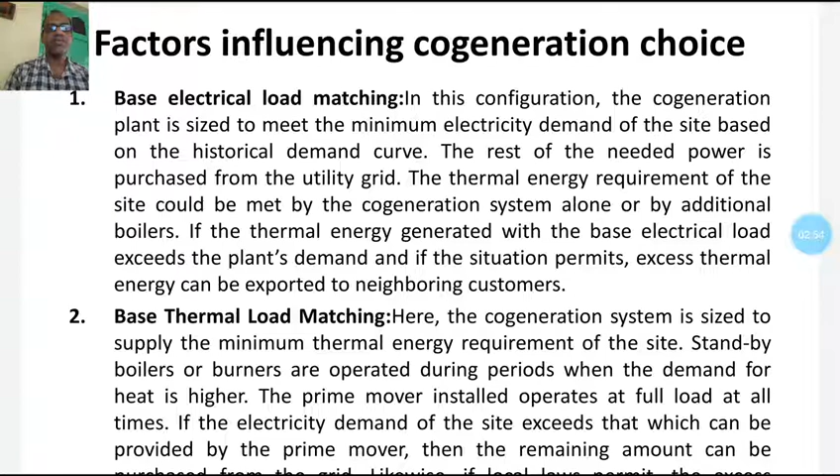Second influencing factor, base thermal load matching. Here the cogeneration system is sized to supply the minimum thermal energy requirement of the site. Standby boilers or burners are operated during periods when the demand for heat is higher. The prime mover installed operates at full load at all times.

If the electricity demand of the site exceeds that which can be provided by the prime mover, then the remaining amount can be purchased from the grid. Likewise, if local law permits, the excess electricity can be sold to the power utility.

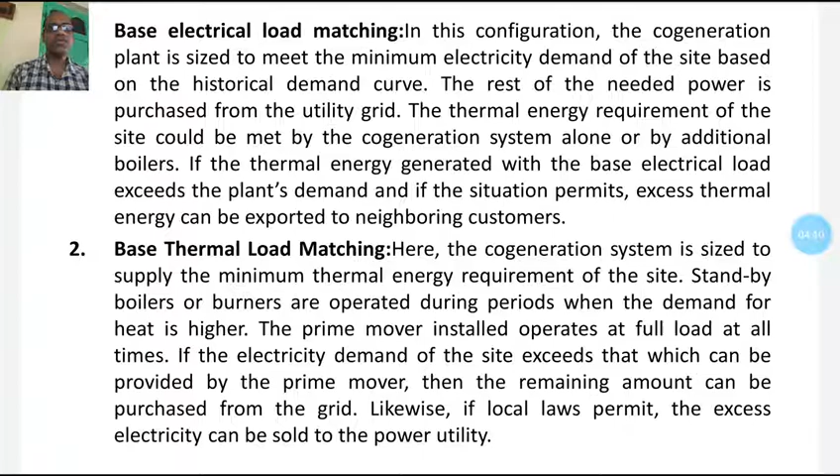Third influencing factor, that is electrical load matching. In this operating scheme, the facility is totally independent of the power utility grid. All the power requirements of the site, including the reserve needed during scheduled and unscheduled maintenance, are to be taken into account while sizing the system. This is also referred to as a stand-alone system.

If the thermal energy demand of the site is higher than that generated by the cogeneration system, auxiliary boilers are used. On the other hand, when thermal energy demand is low, some thermal energy is wasted. If there is a possibility, excess thermal energy can be exported to a neighboring facility.

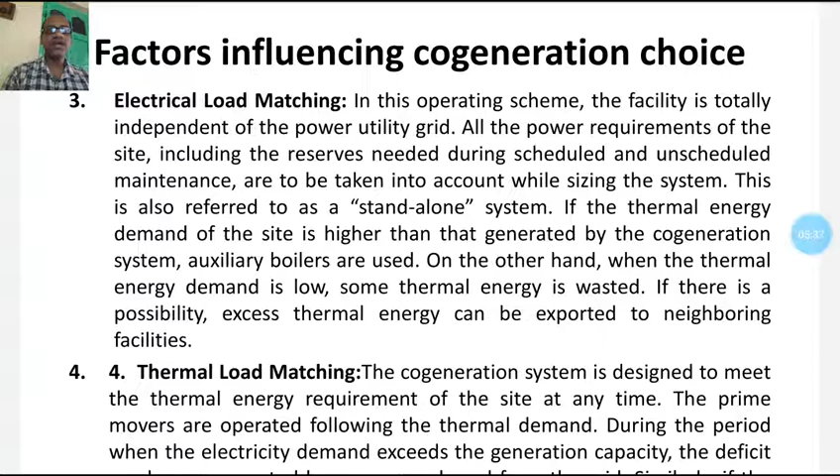Number 4, total thermal load matching. The cogeneration system is designed to meet the thermal energy requirement of the site at any time. The prime movers are operated following the thermal demands. During the period when electricity demand exceeds the generation capacity, the deficit can be compensated by power purchased from the grid. Similarly, if the local legislation permits, electricity produced in excess at any time may be sold to the utility.

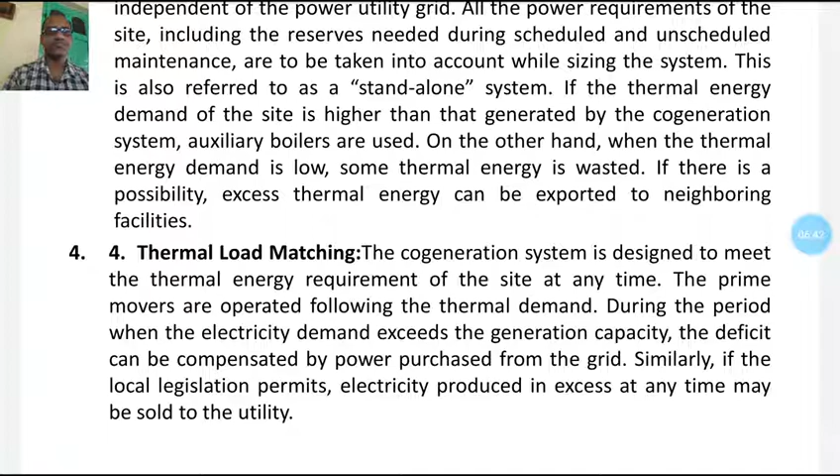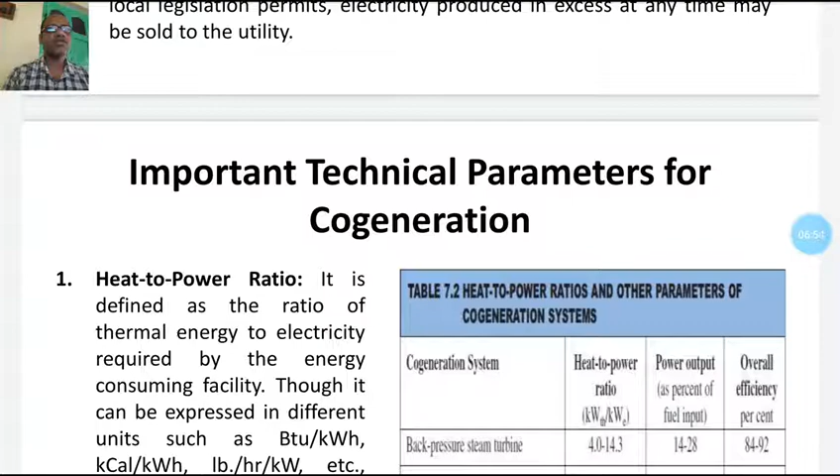So these are a few different factors influencing the cogeneration choice. Next, what are the important technical parameters for cogeneration, which is very important. While selecting a cogeneration system, one should consider some technical parameters that assist in defining the type and operating scheme of the different alternative cogeneration systems to be selected.

First of all, heat to power ratio. Heat to power ratio is one of the most important technical parameters influencing the selection of the type of cogeneration system. The heat to power ratio of a facility should match the characteristics of the cogeneration system to be installed.

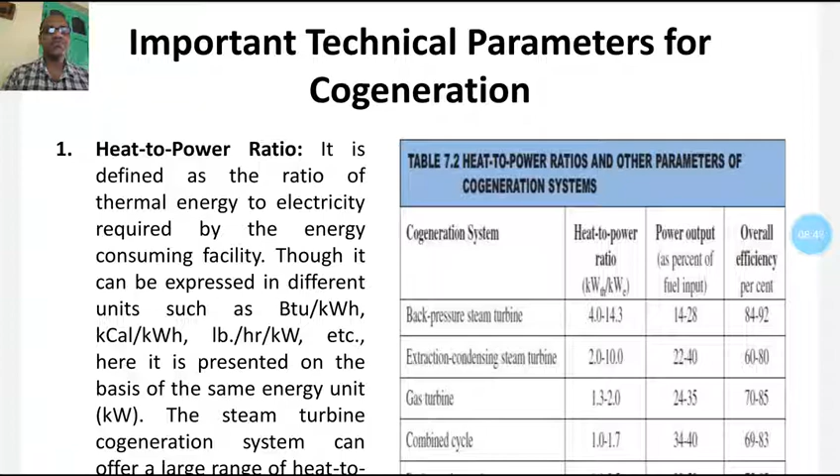Heat to power ratio is defined as the ratio of thermal energy to electricity required by the energy consuming facility, though it can be expressed in different units such as BTU, that is British thermal unit per kilowatt hour, kilocalorie per kilowatt hour, etc. Here it is presented on the basis of the same energy unit, that is kilowatt. Basic heat to power ratios of the different cogeneration systems are shown in this table with some technical parameters. The steam turbine cogeneration system can offer a large range of heat to power ratios.

Now, if we see the table, the type of cogeneration system, that is back pressure steam turbine system, heat to power ratio, that is kilowatt thermal per kilowatt electrical. If we use a back pressure steam turbine, it will be between 4 to 14.3, power output as a percentage of fuel input within 14 to 28, and overall efficiency of the plant, that is 84 to 92%.

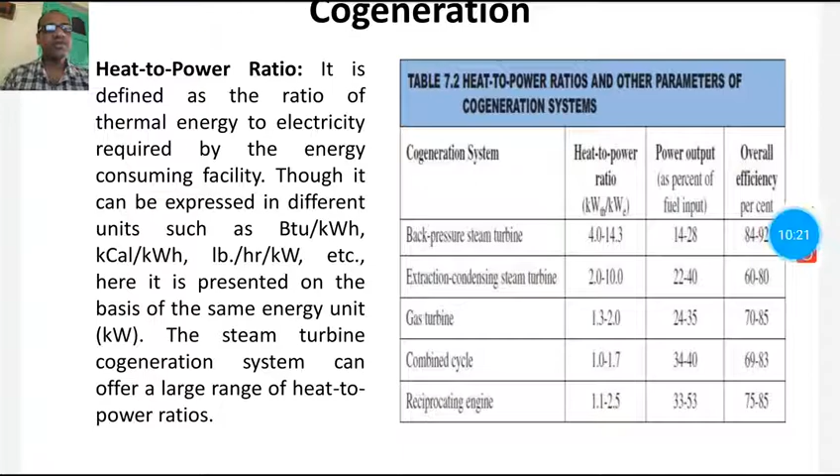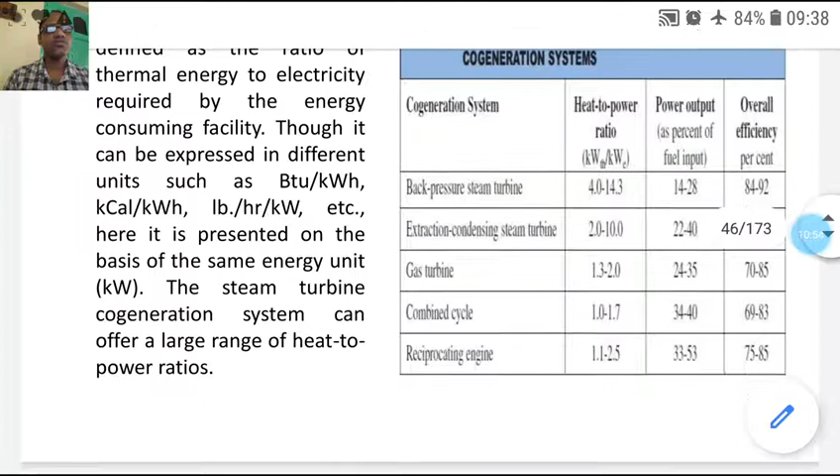Extraction condensing steam turbine: heat to power ratio 2 to 10, power output as a percentage of fuel input 22 to 40, and overall efficiency of the plant 60 to 80. Gas turbine: if we choose a gas turbine cogeneration system, heat to power ratio is 1.3 to 2, power output is between 24 to 35, and overall efficiency varies from 70 to 85%.

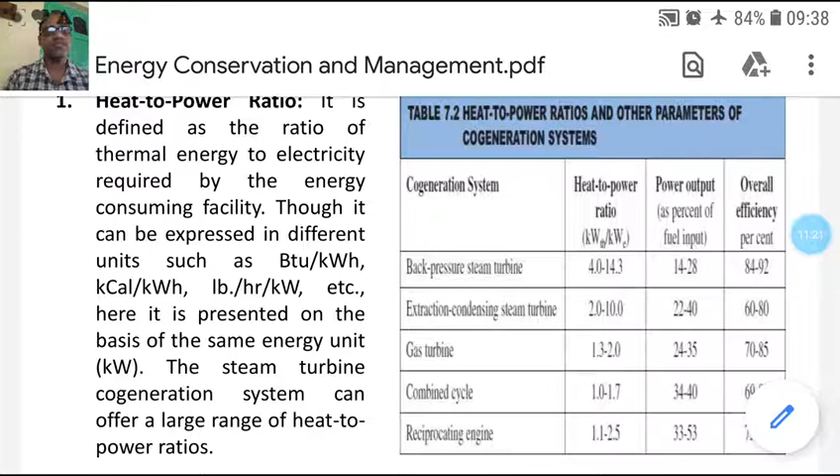Combined cycle: in case of combined cycle, heat to power ratio is 1 to 1.7 only, power output 34 to 40, and overall efficiency varies from 69 to 83%. And in case of reciprocating engine, heat to power ratio 1.1 to 2.5, power output 33 to 53, and overall efficiency 75 to 85.

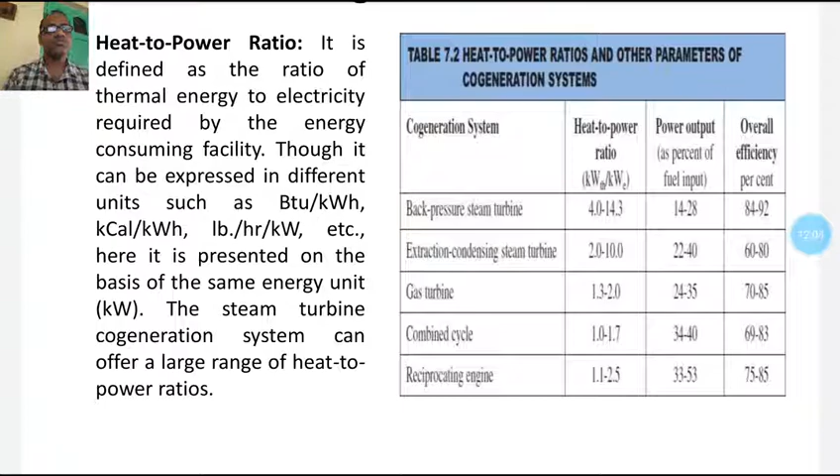Cogeneration uses a single process to generate both electricity and usable heat or cooling. The proportions of heat and power needed, that is heat to power ratio, vary from site to site, so the type of plant must be selected carefully, and an appropriate operating scheme must be established to match demands as closely as possible. The plant may therefore be set up to supply part or all of the site

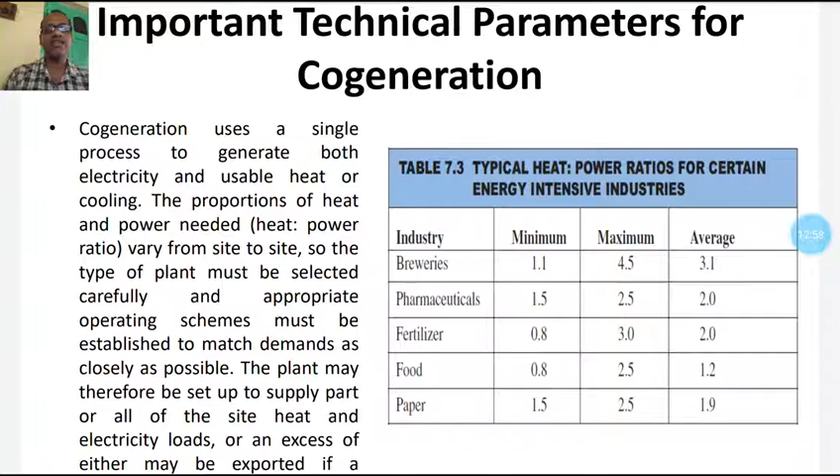heat and electricity load, or an excess of either may be exported if a suitable customer is available.

Now the following table shows heat to power ratio for certain energy intensive industries. First of all, breweries: minimum 1.1, maximum 4.5, and average 3.1. Pharmacy industry: minimum 1.5, maximum 2.5, and average 2. Fertilizer industry: 0.8 minimum, maximum 3, and average is 2. Food industry: minimum 0.8, maximum 2.5, average is 1.2. Paper industry: minimum 1.5, maximum 2.5, and average 1.9.

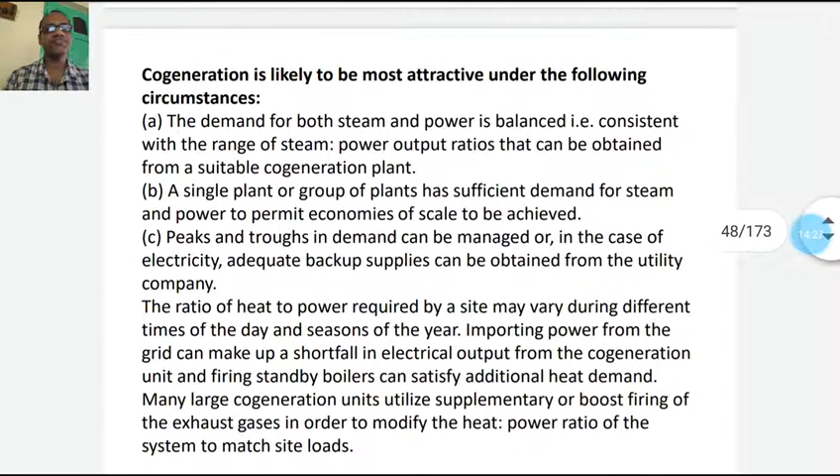Cogeneration is likely to be most attractive under the following circumstances. Number 1, the demand for both steam and power is balanced, that is consistent with the range of steam and power ratio output that can be obtained from a suitable cogeneration plant. A single plant or group of plants has sufficient demand for steam and power to permit economies of scale to be achieved. Peaks and troughs in demand can be managed, or in case of electricity, adequate backup supplies can be obtained from the utility company.

The ratio of heat to power required by a site may vary during different times of the day and seasons of the year. Importing power from the grid can make up shortfall in electricity output from the cogeneration unit, and firing standby boilers can satisfy additional heat demand. Many large cogeneration units utilize supplementary or boost firing of exhaust gases in order to modify the heat power ratio of the system to match site load.

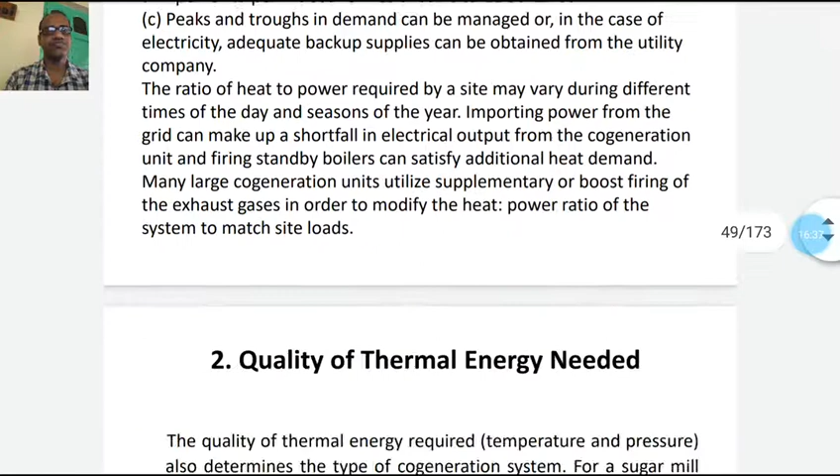Next, the important technical parameters, that is quality of thermal energy needed.

The quality of thermal energy required, that is temperature and pressure, also determines the type of cogeneration system. For a sugar mill, the thermal energy needed is about 120 degrees centigrade. A topping cycle cogeneration system can meet the heat demand. On the other hand, for a cement plant requiring thermal energy at about 1450 degrees centigrade, a bottoming cycle cogeneration system can meet both high quality thermal energy and electricity demand for the plant.

Next parameter, that is load pattern. The heat and power demand patterns of the user affect the selection, that is type and size, of the cogeneration system. For instance, the load pattern of two energy consuming facilities are shown in the figure, that will lead to two different sizes and possibly types of cogeneration system. So in factory A, the electricity demand is shown as a bold line, and in factory B, the thermal energy required is shown as a dotted line.

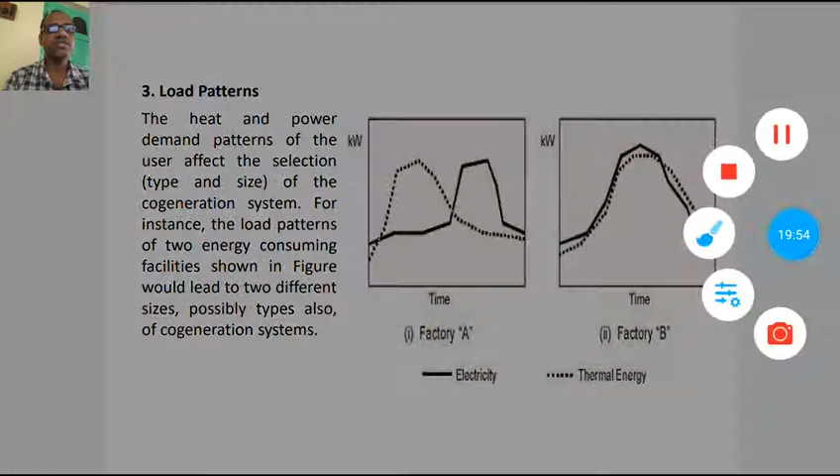In factory A, that is the load pattern, as we can see, when the thermal energy is required, at that time the electricity is required much less, and when the electricity is required in much higher proportion, the thermal energy is less. So it is just opposite for the two things, thermal energy as well as electricity in factory A. When the thermal energy demand is high, electricity is required low, as we can see here in this figure. This is the thermal energy as shown in dotted line, and in case of electricity, this curve is when the thermal energy is required low.

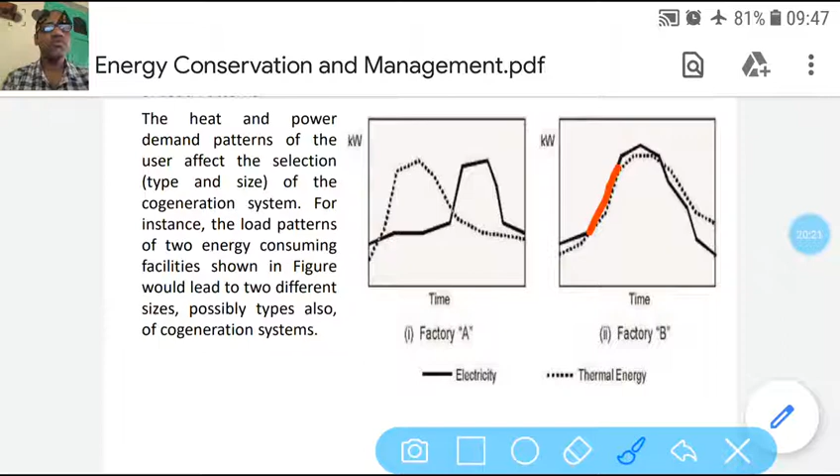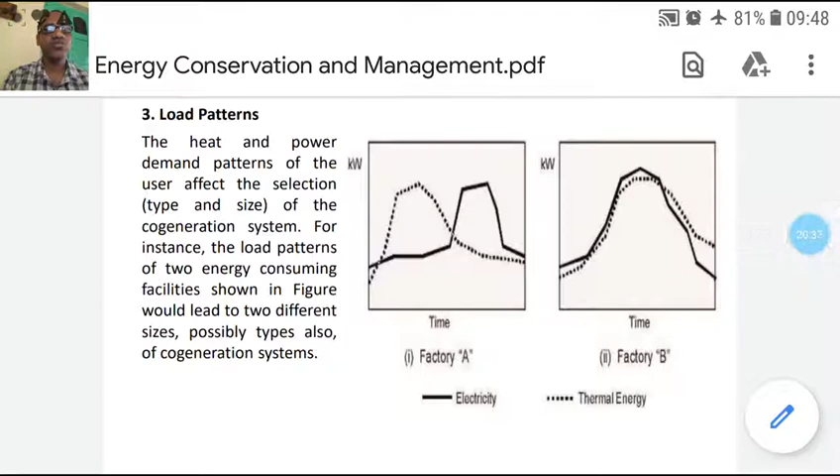But in factory B, as we can see, the electricity and the thermal energy required is nearly the same. So the type of cogeneration system that will be required for these two different factories will be different, and the type and size of the plant capacity, etc., will also be different.

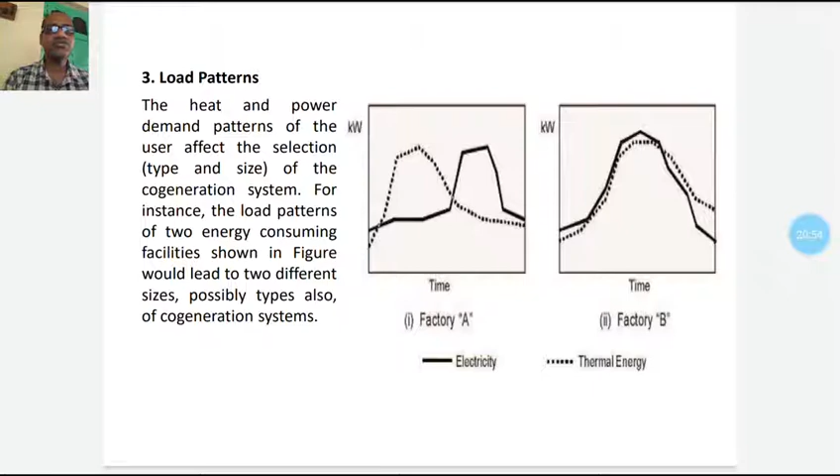Next factor, that is fuel availability. Depending on the availability of fuels, some potential cogeneration systems may have to be rejected. The availability of cheap fuels or waste products that can be used as fuels at a site is one of the major factors in the technical consideration, because it determines the competitiveness of the cogeneration system. For example, a rice mill needs mechanical power for milling and heat for paddy drying. If a cogeneration system were considered, the steam turbine would be the first priority, because it can use the rice husk as a fuel, which is available as waste product from the mill.

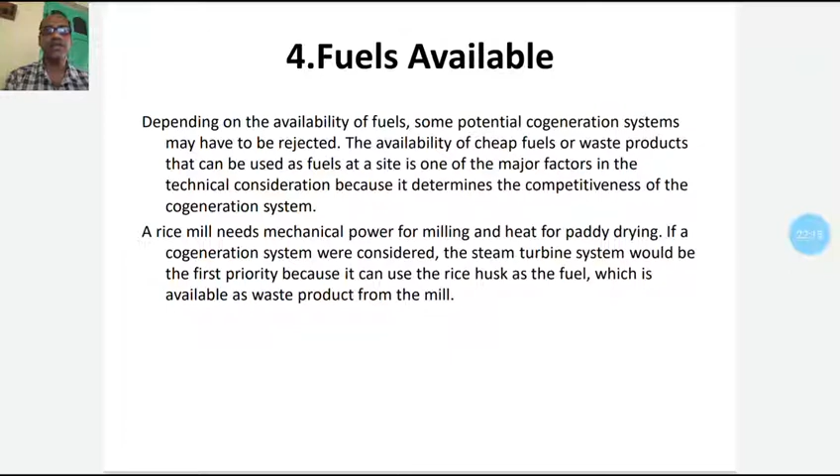Next important technical parameter, that is the system reliability. Some energy consuming facilities require very reliable power and or heat. For instance, a pulp and paper industry cannot operate with a prolonged unavailability of process steam. In such instance, the cogeneration system to be installed must be modular, that is, it should consist of more than one unit, so that shutdown of a specific unit cannot seriously affect the energy supply.

Number 6, that is grid dependent system versus independent system. A grid dependent system has access to the grid to buy or sell electricity. The grid independent system is also known as a stand-alone system that meets all energy demand of the site. It is obvious that for the same energy consuming facility, the technical configuration of the cogeneration system designed as a grid dependent system would be different from that of a standalone system.

Next, number 7, retrofit versus new installation. If the cogeneration system is installed as a retrofit, the system must be designed so that the existing energy conversion system, such as boilers, can still be used. In such circumstances, the option for cogeneration system would depend on whether the system is a retrofit or a new installation.

Number 8, electricity buyback. The technical consideration of cogeneration system must take into account whether local regulation permits electric utilities to buy electricity from the cogenerator or not. The size and type of cogeneration system would be significantly different if one were to allow the export of electricity to the grid.

So these are all the main 9 points, or the 9 technical considerations, to choose a cogeneration system. The most important thing is that there is the heat to power ratio, which is the most important parameter, and for different installations, it depends which cogeneration system we need to employ.

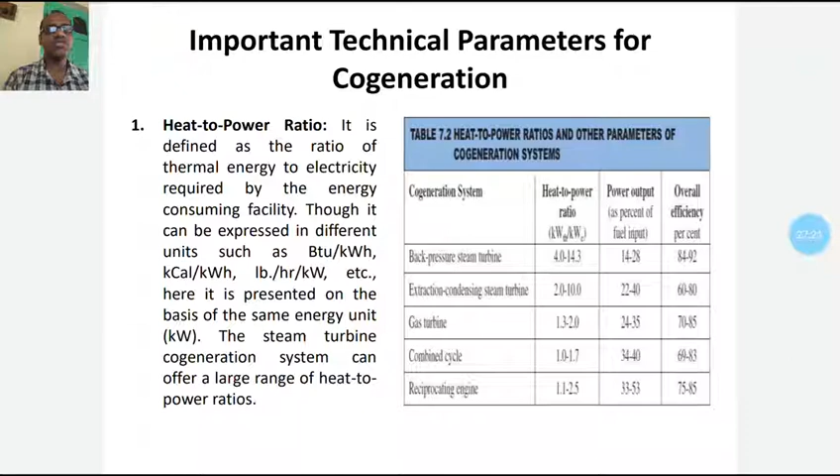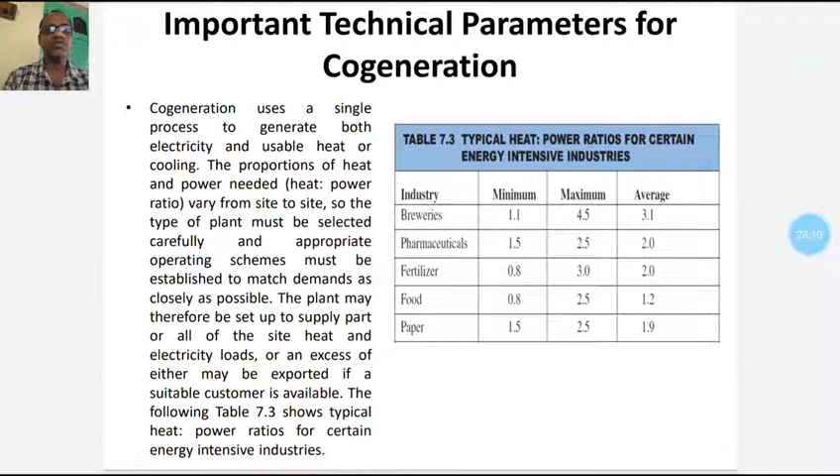And industry wise also, what type of system will be best suited depends on this heat to power ratio. Like pharmacy, fertilizer, food and paper industry, industry wise their heat to power ratio varies from minimum to maximum and average. So one needs to choose very efficiently, so that the ultimate costing of the products and the operation cost of this plant will be minimum.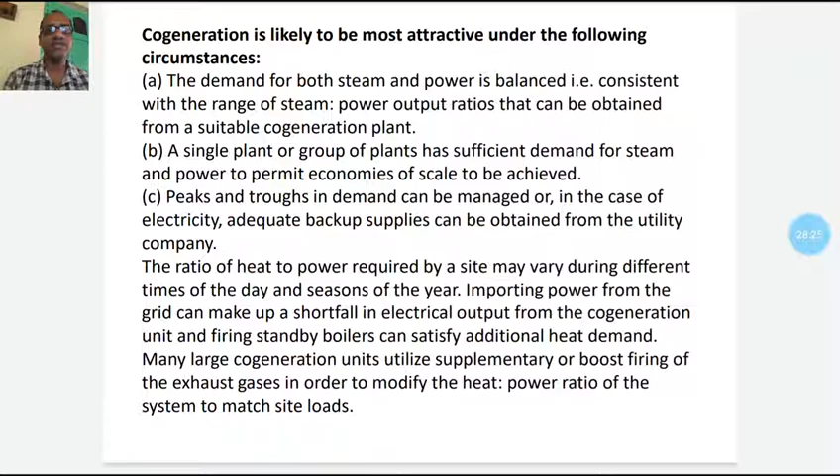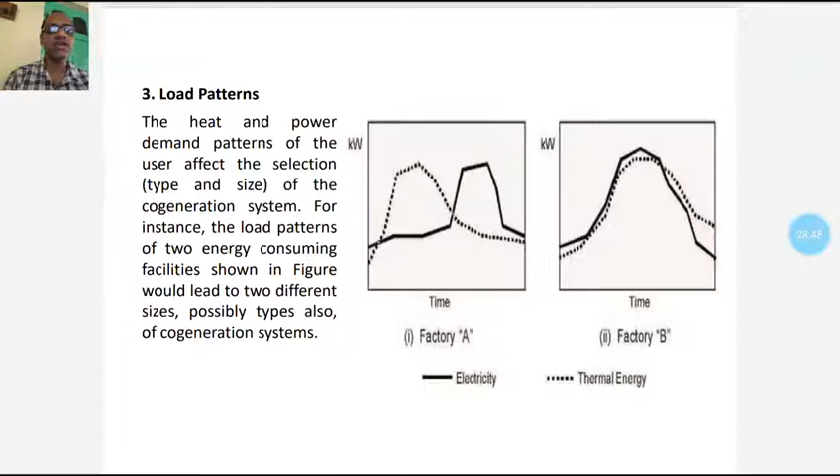And cogeneration is most attractive under the following circumstances. As we know, when the demand for both steam and power is balanced, that we have discussed in case of load pattern, it will be the most attractive way. In factory B, as we see, the electricity and the thermal energy demand are nearly the same, and a single plant or a group of plants has sufficient demand for steam and power to permit economies of scale to be achieved. So if we think economically, the steam and power demand should permit a plant or a group of plants to be set up from an economic point of view, and peaks and troughs in demand can be managed.

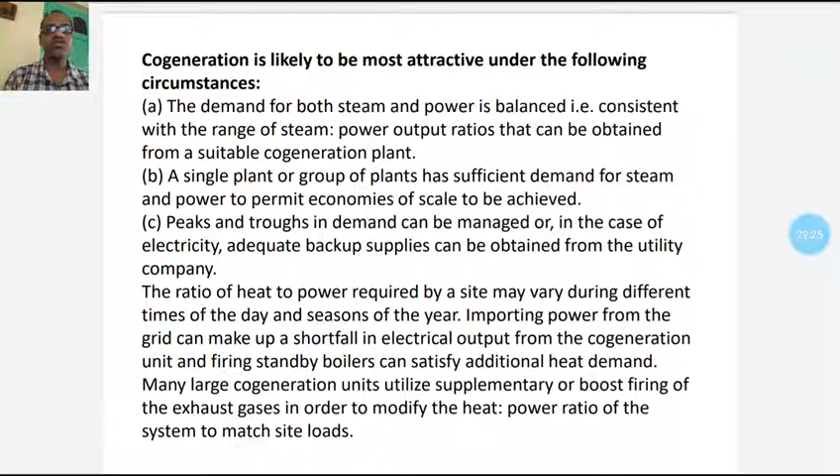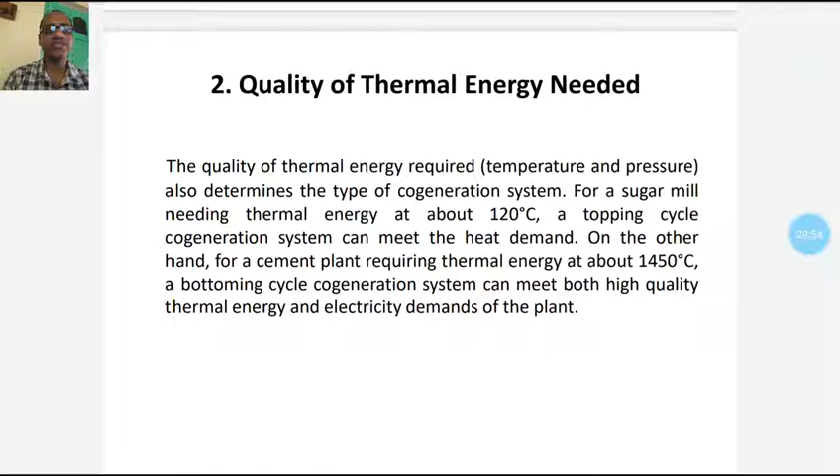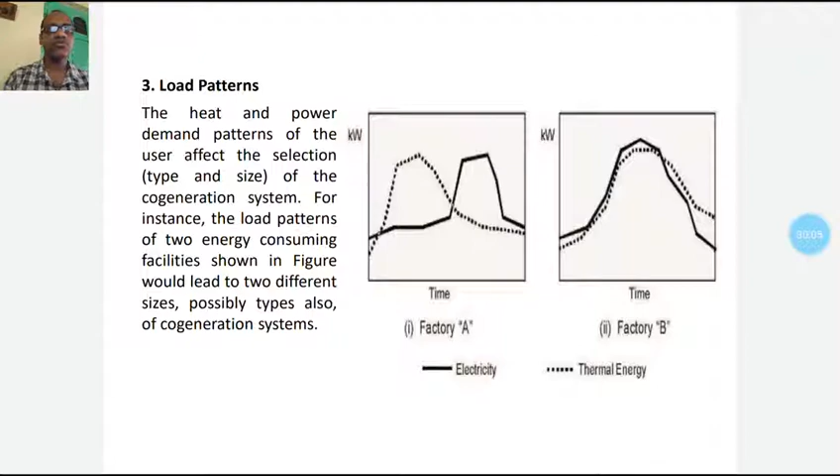In case of electricity, adequate backup supply is also required. Quality of thermal energy depends on the plant, like pharmacy industry, cement industry and the sugar mill industry. Their thermal energy requirement varies. For example, we have discussed that cement industry requires much higher temperature. Load pattern also we have discussed, it varies from factory to factory, and the type of the cogeneration system also needs to be suitably changed.

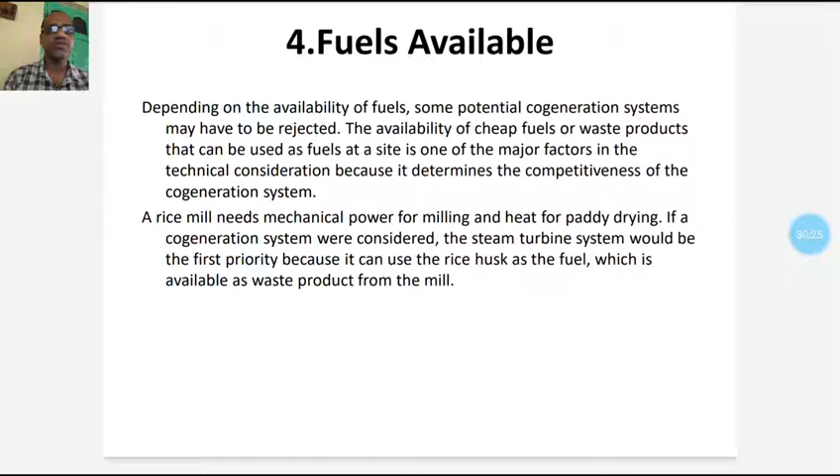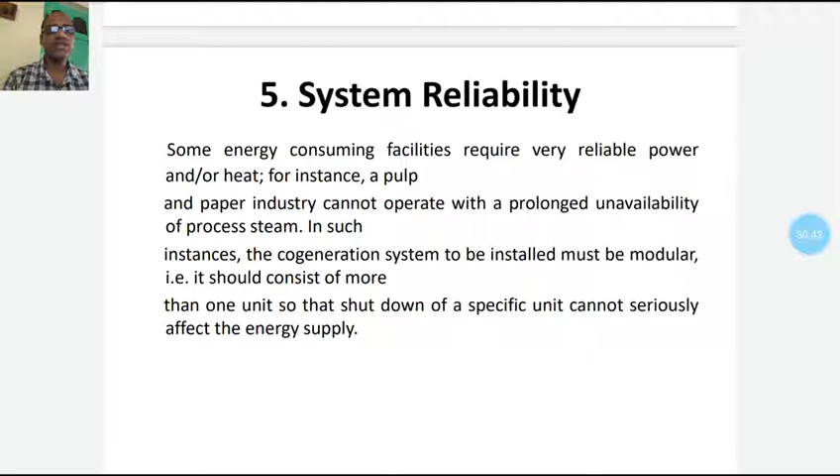Fuel availability, what fuel is available? For a rice mill, the fuel is already available as rice husk, and for the other industries, the flue gas we can utilize in a better way for generating thermal energy. System reliability, whether the system is reliable or not, that is, whether the waste of the industry can produce the generation of electricity or not. Grid dependency, if power is available from the grid, an industry can buy or not, that is also a technical parameter.

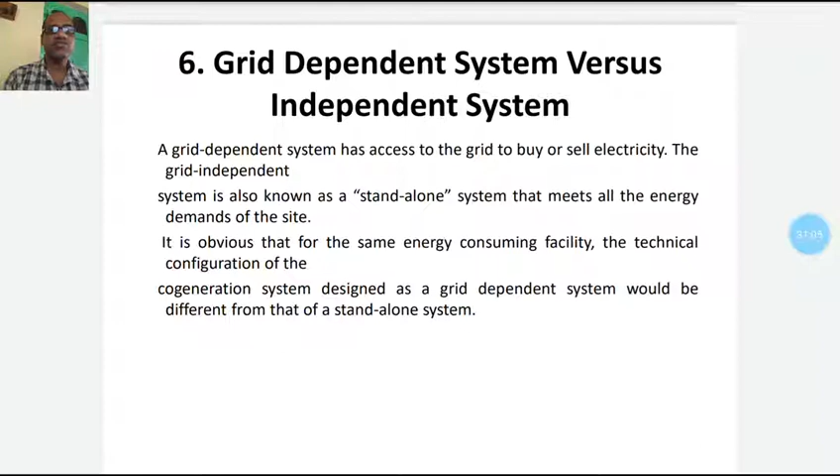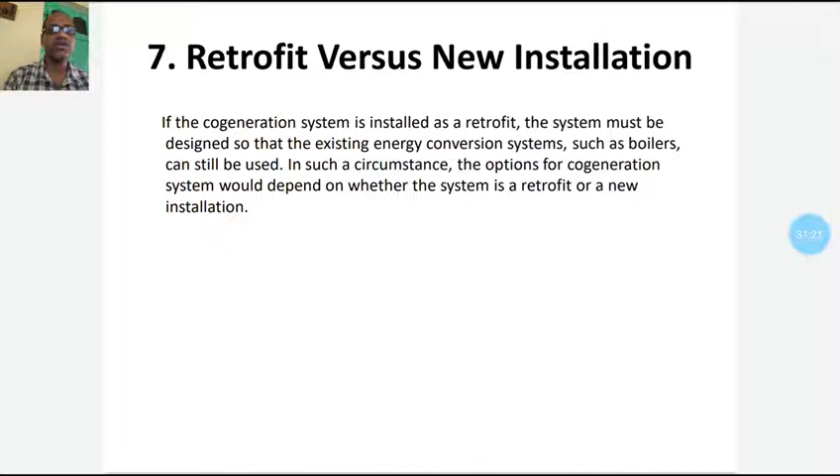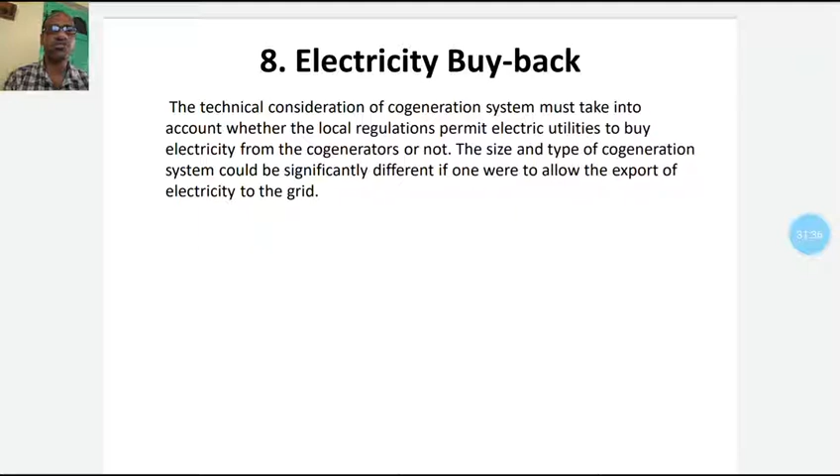Where grid independency is there, more units will need to be installed. Retrofit versus new installation: suppose an existing system is there, if we can modernize that system, that is the retrofitting, or otherwise we have to go for a new installation. Electricity buyback also requires local permission, whether the excess electricity can be utilized by the local customers or not, that will give profit to the industry.

And local environmental regulations, the type of fuel that is actually burned and the type of exhaust gas that is released into the atmosphere, also have an impact on the technical parameters of choosing a cogeneration system.

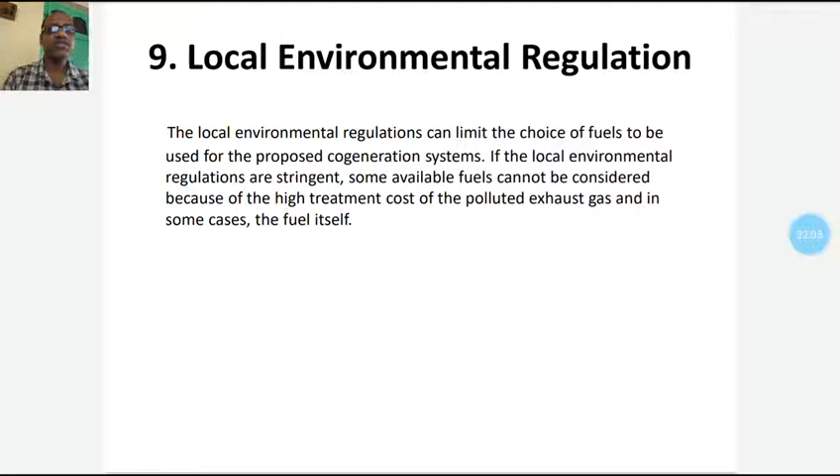So with this we will end this session, and in the next session we will discuss the other topics, that is prime movers, what the prime movers of the cogeneration system are, and so on.